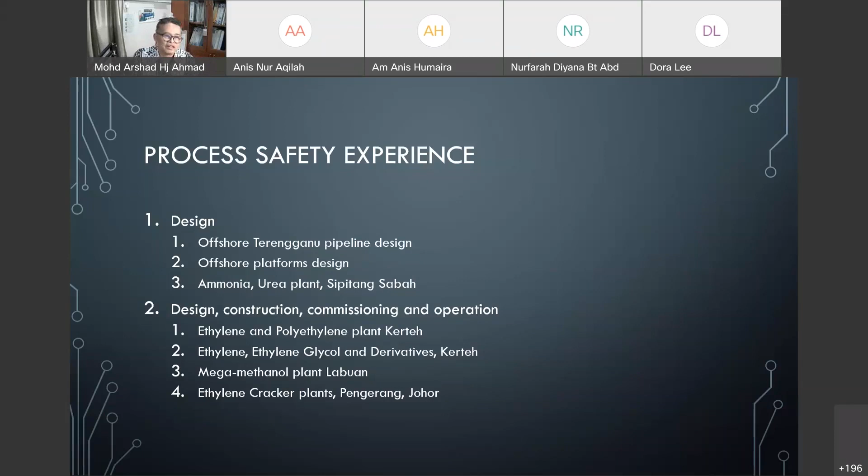I joined Petronas in 1980 until 2009. I retired in 2009, but continued my work with the company for the next 10 years until 2019, when I said, Mr. Petronas, I think I have enough. I'm too old to work already. My age is almost 68 years. Okay.

Okay. What's the objective of this presentation? By the end of it, I would like to introduce you to the knowledge of the safety aspects to be considered in plant design. Because without safety, the plant won't be safe. Always consider safety in every phase of the work in a petrochemical plant. Otherwise, something may happen, just like what we had this month or last month in Pasir Gudang.

Hopefully by the end of this session, you'll be able to understand the aspects of plant design. You know, plant design is not only designing the process. Every aspect of the plant you need to design. Even clearing the land from the jungle forest, there is a design over there. Safety risk in all aspects of the plant design. The types of accident that can occur during plant construction or commissioning. Always during construction and commissioning, there are a number of accidents happening.

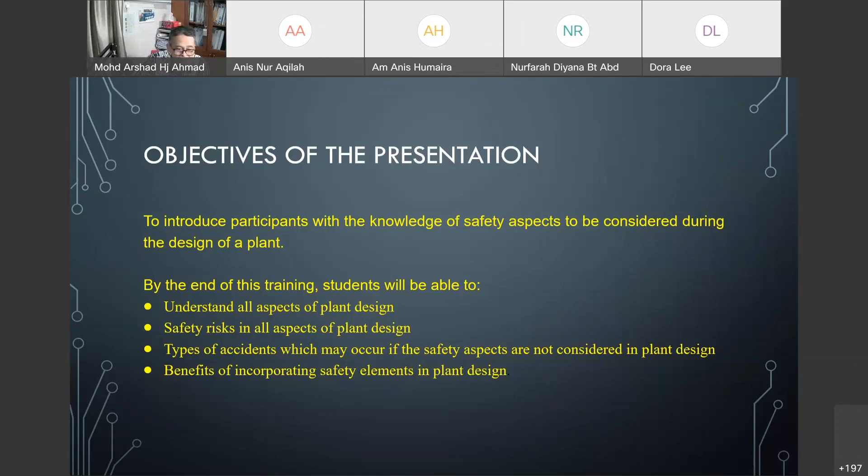And the main benefit of incorporating a safety element in the plant design. Special note: you are advised to focus on this presentation because there are not many notes. What I'm presenting is basically what I have been involved in, what I have seen, what I've managed in the past. So most of them are pictures, and whatever I say, take paper and note it down. I believe you have all the notes given by Dr. Yusuf. Maybe if time permits, we can have a quiz.

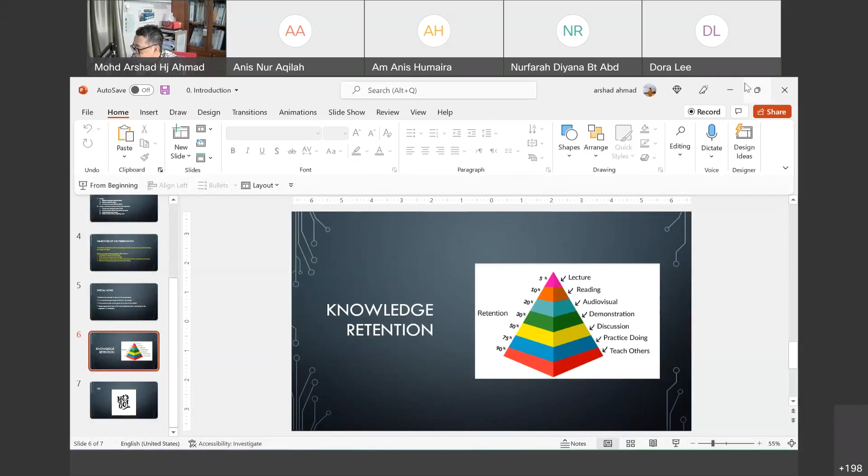Wait, I got a problem with this. Where is the? It became small. I'm not familiar with... kecil pula. Where is the sharing?

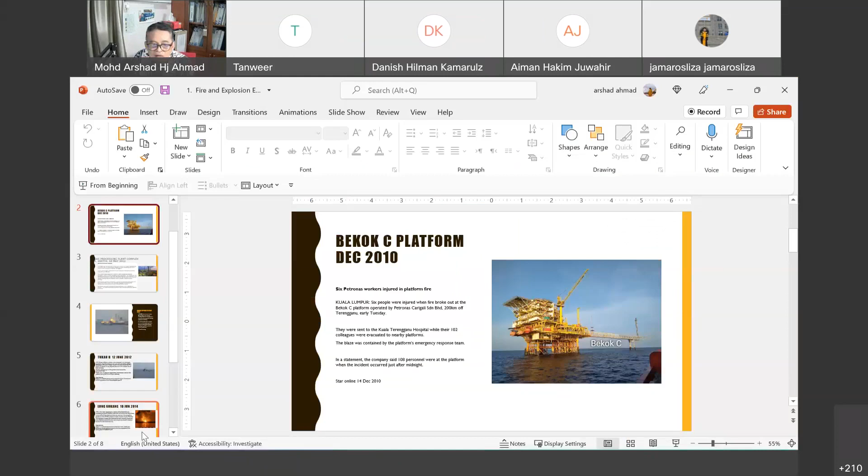Doctor, you just need to go to slideshow beside animation. Click the slideshow on the top. Oh, yeah, that one. Yeah, I have, but still the same. Actually, not this one, doctor. Where should Tuan Haji click? End the slideshow first. End slideshow. Okay. And then press on slideshow, which is beside animations on the top: animation, slideshow, review, help, view.

You mean click the animation? No. Click the slideshow tab, doctor, on the top of the slide. On the top they have some tabs. Annotate, participant, video mute, assign, share. Try to end the slideshow first. I have ended several times. Okay, and at the top you see insert, draw, design, transitions, animation, slideshow. The menu in your PowerPoint.

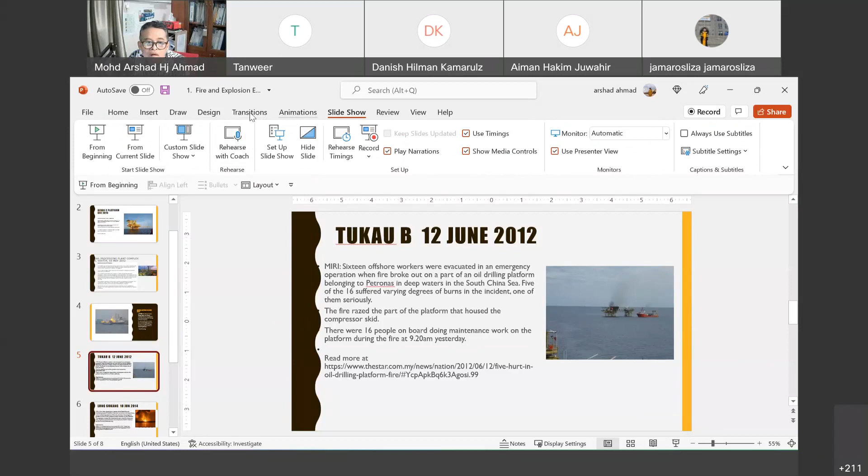On the top. Oh, slideshow. Yeah, that one. Okay. Not now. Then you can press from current slide, which is just there. No, doctor, below, right there. Oh, okay. Slideshow, from current slide. Now what do you see? It's still the same, doctor.

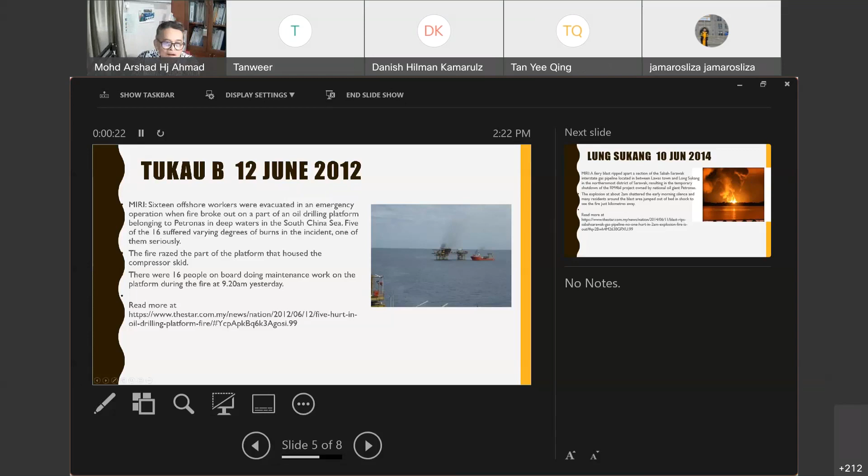Excuse me, I think this one can be much better. You can try to share the application. Just now, did you share the screen or the application? I don't know. You can just duplicate the slideshow. Okay. Now it's better. Now we can see your full screen, Tuan Haji. Okay, thank you, doctor. Now where is my screen? Let me do it again.

We planned to practice with Dr. Yusuf, but he had no time. Okay, got it.

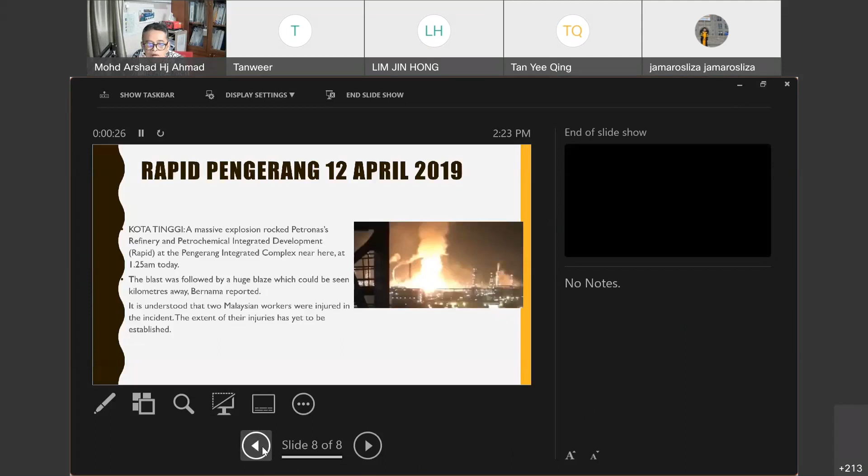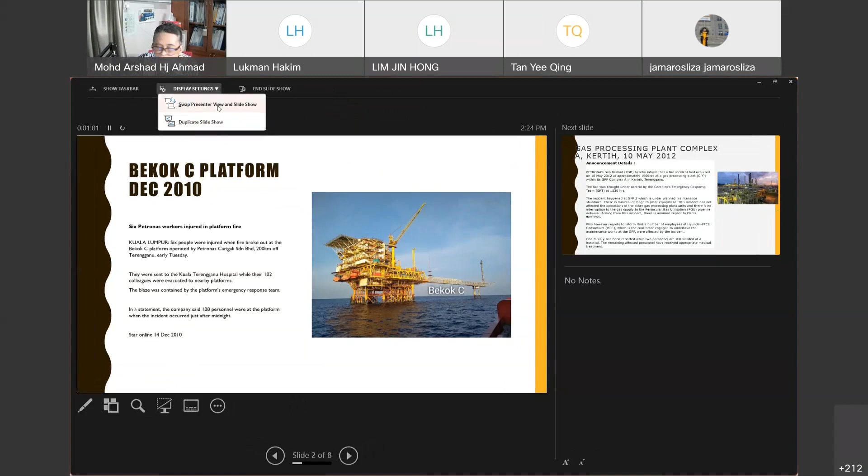It seems like it's back to the previous one, not full screen view. You can use the duplicate under the display setting. Something wrong. Do you see? Still the presenter view, sir. Okay, no problem. I think you can untick use presenter view in the slideshow settings. What do you see? Still the presenter view. Just click duplicate, it will be easy. Click duplicate. Okay.

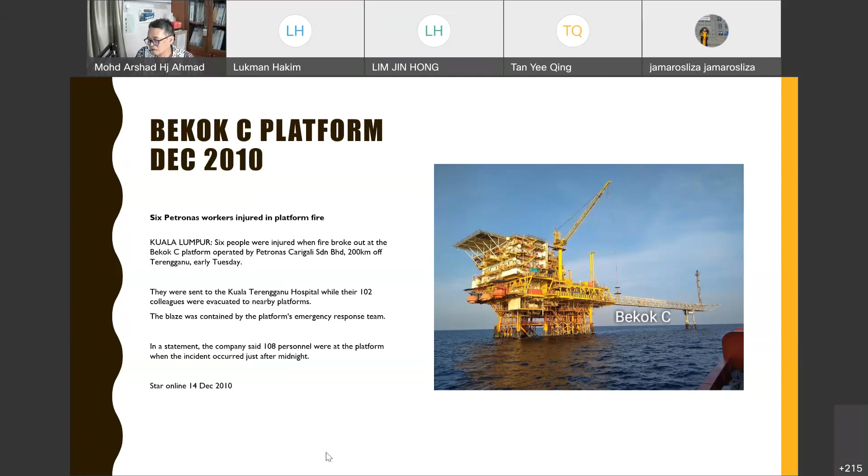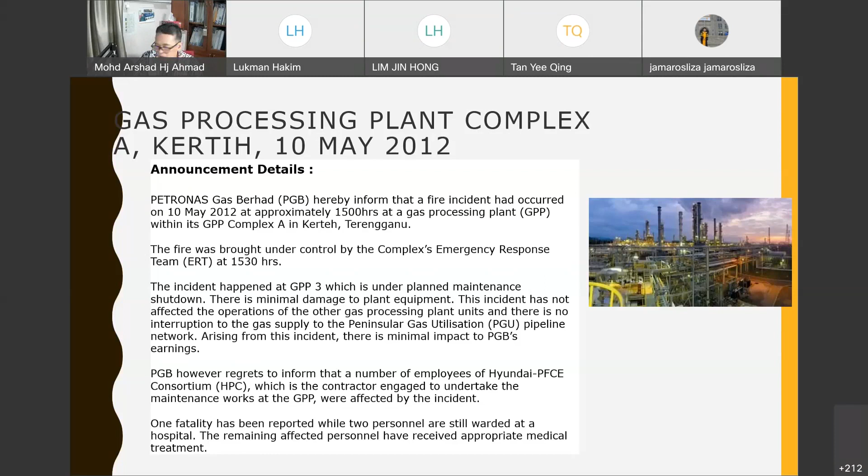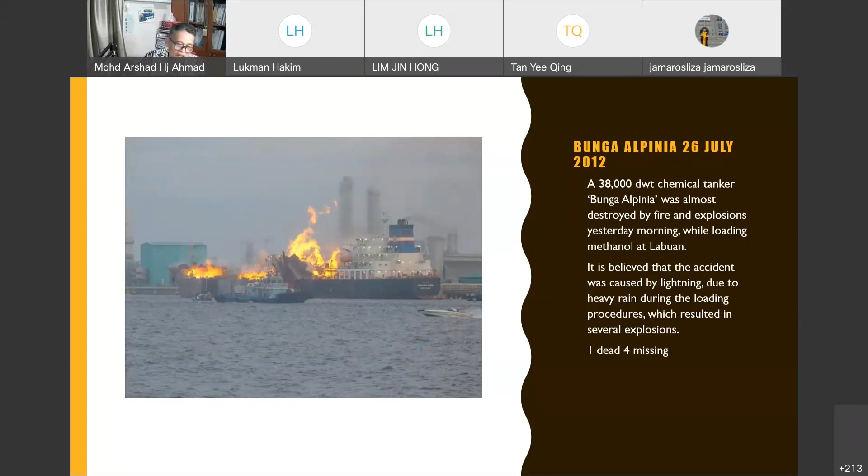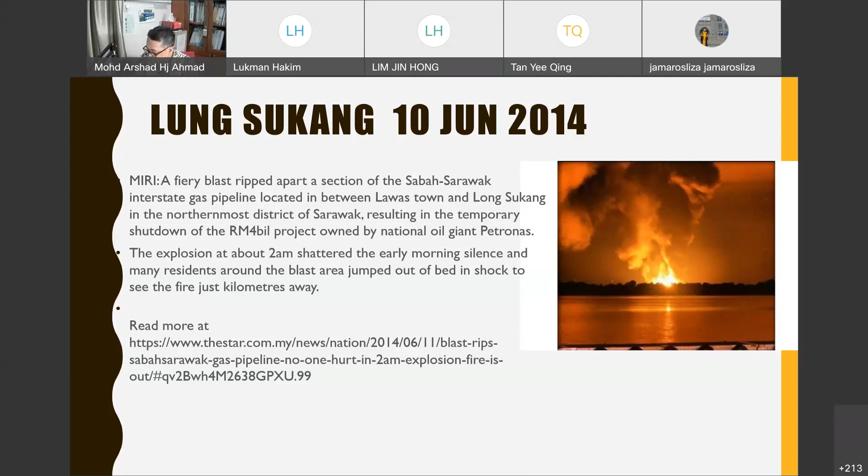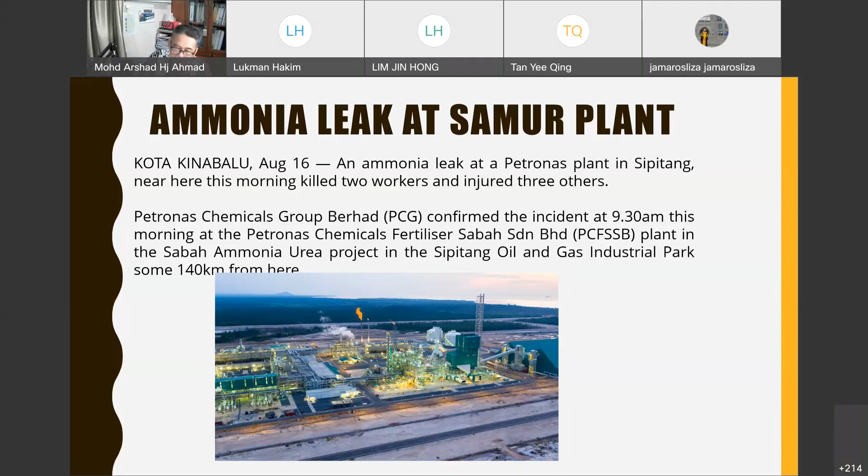Very bad. This is the latest, in Pengerang on 12 April. On 11 April - this wasn't my project, it was somebody else's; my project was the ethylene plant. On the 11th, I said goodbye to this plant, my final day at Rapid Pengerang. I reached KL at night. About 1:30, somebody called me and said there was an explosion in Rapid. I asked which one - refinery. Alhamdulillah, not mine, but it was a huge explosion.

What exploded was just - what do you call it - a cooler at the top. When the gas is hot, you have a cooler with a fan to cool the gas. It was hydrogen.

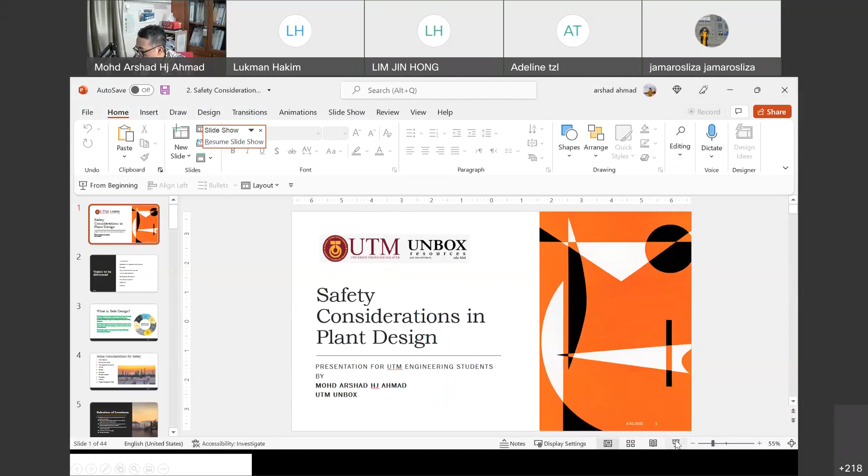This is the main topic that I'm going to present. It's about 40 slides. Hopefully you can manage it within one hour, two hours.

Safety consideration in plant design. You have seen the accident, and you must be concerned with the safety for the plant, because after the design, you will give it to construction. Construction will construct according to your design, and after construction finishes, they hand over to operation, and your design work is still there.

Unless there are some safety, unsafe items that we have overlooked and didn't consider, and no action has been done to correct the situation, that issue will be carried over from design, construction, commissioning, and operation, and will be there forever unless there are some reviews to be conducted.

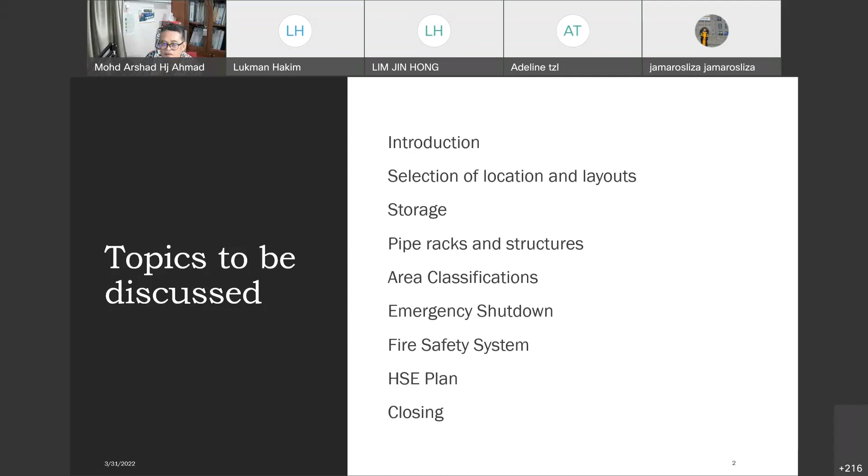Okay, what is a safe design? Safe design means integration of control measures early in the design process. What do you do? You have to look at the P&ID. What is P&ID? It's the drawing. Study the drawing, and if there is any safety concern, you have to look into it, remove it, and correct it.

So integration of control measures early in the design process to eliminate or minimize risk, not only during design but throughout the life of the plant until it is decommissioned. What is decommissioned? Until it's no longer productive, that's the end of life, whereby we mothball, meaning we dismantle the plant.

Where do we start? We start from the design. What do you do? You choose. What about the design? What is the safe design? Choose the type of design that you want to do. For example, you want to process methanol. You have to choose the correct design, not just any.

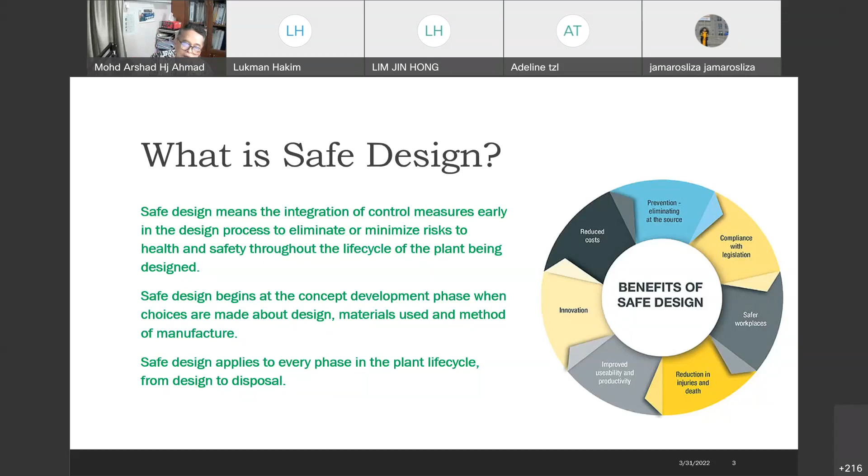Normally there are many designs in the market, and for methanol we don't have the design ourselves. We buy the design from a designer licensor, but we still have to review because they just give the simple process, and from there we have to do all the details. So safe design applies from the design itself until the end of the plant.

Okay, some considerations for safety: plant location, site and plant layout. If you have any question, just voice it out, because I don't know the chat. I cannot read the chat.

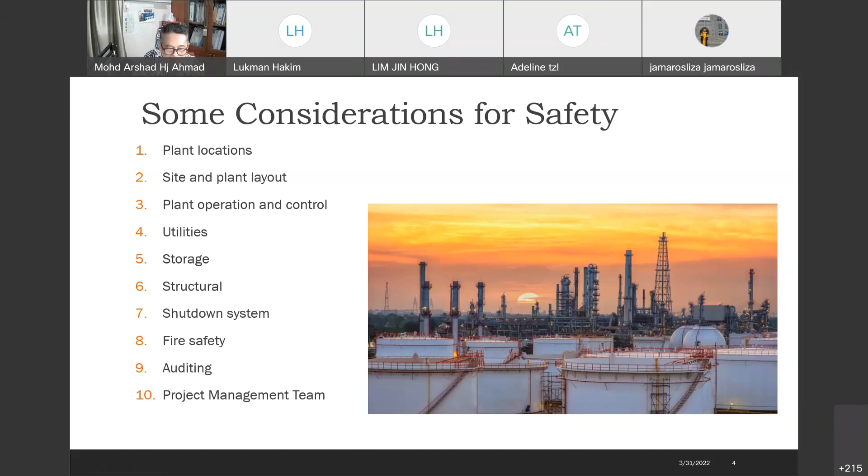Site and plant layout, plant operation and control, utilities, storage, structural, shutdown system, fire safety, and all those project management team.

Selection of location. Where do you want to build your plant? Of course, something that is cost effective, especially in production and transportation of material, either raw material as well as exporting product. When they built the ammonia urea plant in Gurun, they found out they didn't have any transportation plan, so they had to build a railway from Gurun to the port. I think it was Prai port. That's why you need to think wide. We need to have a wide view.

Where do you locate your plant, away from the main population? You look at Pasir Gudang, you have plant and housing side by side, and it is very unsafe. Okay, we'll talk later, I will show you.

Located where products and raw material can be easily transported. Okay, where is the best place? That's why you see most of the plants in Malaysia are located near the sea or near the port, because the port is already there.

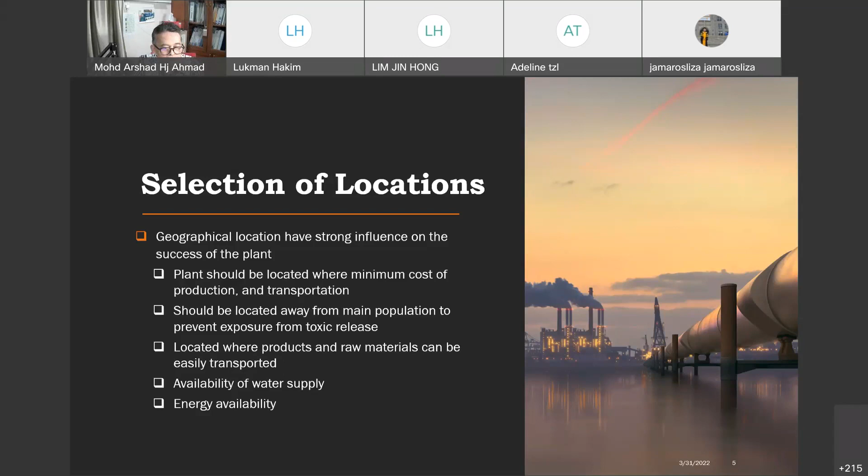And this shouldn't happen. When you build a plant, or design an industrial area, access is important. That's why normally all these plants are located near the port. Like Kuantan Port, you have Gebeng industrial area. Bintulu Port, you have Bintulu industrial area. Kerteh, you have industrial area, and you have Kerteh Port. Very easy for transportation of material. And of course the water.

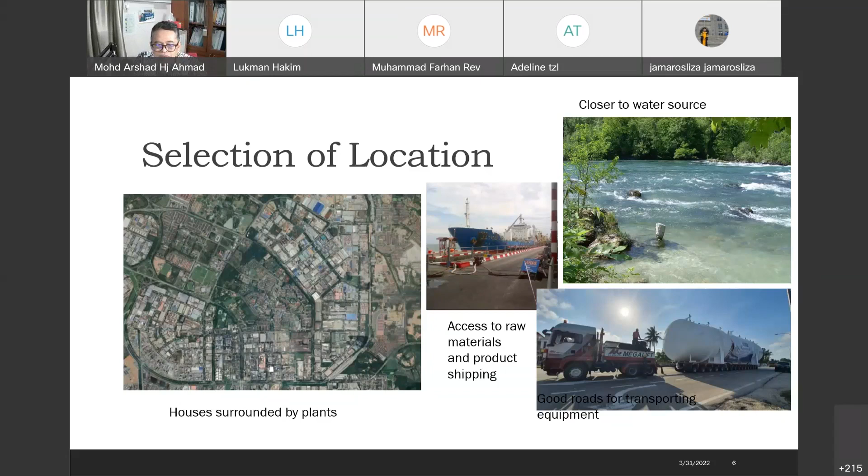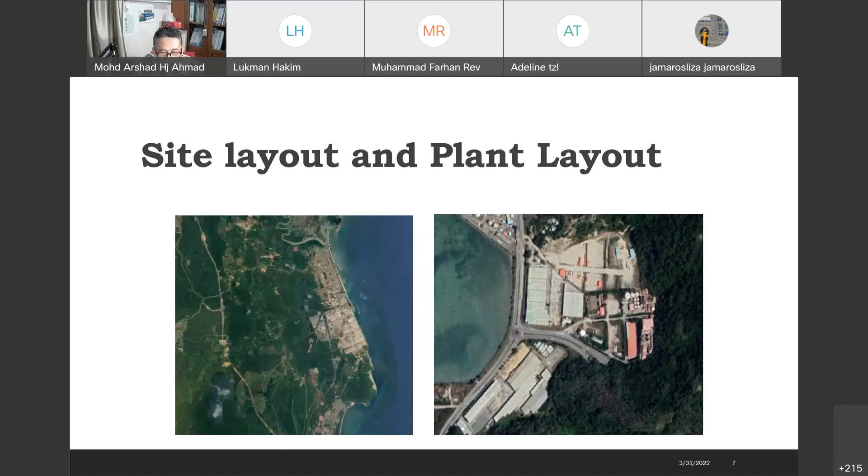Okay, you see the layout here. This is Kerteh complex. See, on the north is empty, on the south is empty. East is sea, west is still jungle. So housing is just very far away in the south, separated by a hill, and even in the north it's separated by river, but there is no housing around.

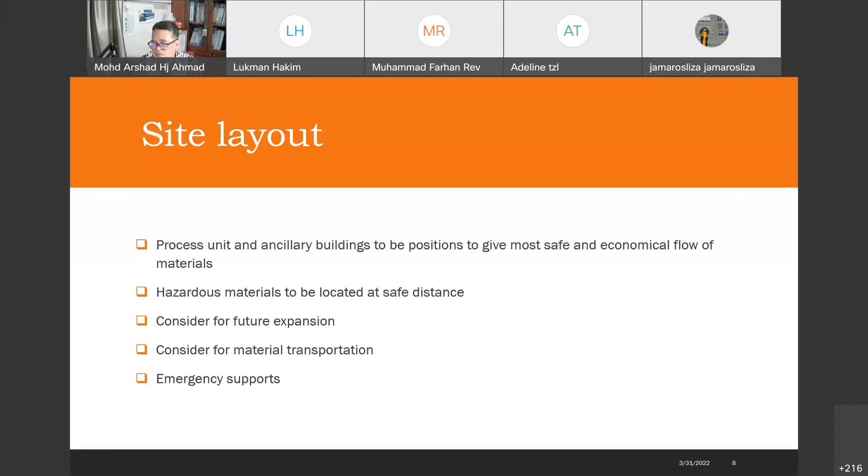Okay, site layout. How do you arrange your site layout? Process units and all the ancillary buildings, facility building positions must be in an economic flow. What does it mean? The piping, the wiring, cabling must be nearest to the production, so that's easy access. Another consideration is economic. Another one is safety. Why safety? Because you need to be very near to the facilities, very near to the fire water system and so on. And also you consider the future expansion, I will show later. And consider the material transportation and emergency support.

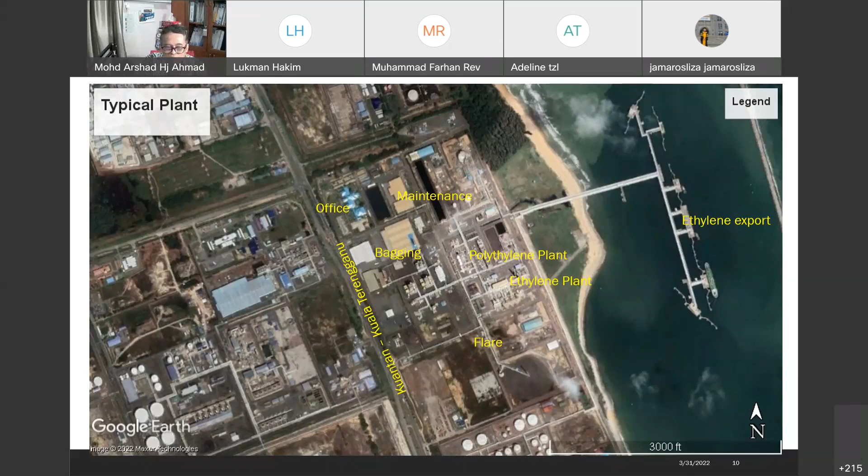Okay, look, this is my first plant, petrochemical plant. This is an ethylene polyethylene plant. You see, we have the highway, we have office, we have maintenance building, and the plant is way away from the main building, from maintenance office and so on. And why do you have a port here? Because it's easy for us to transport, to export our product. Our product is basically ethylene liquid. Or maybe we import some material, very near to the port, and it's very easy. Okay, so if there is any emergency, the office won't be affected.

Okay, some rules about layout. Building should be sited near the process. Utility building - what are the utility buildings? Utility buildings are control room, utility building, compressor utility building, nitrogen utility building, electric, and so on. Those are it.

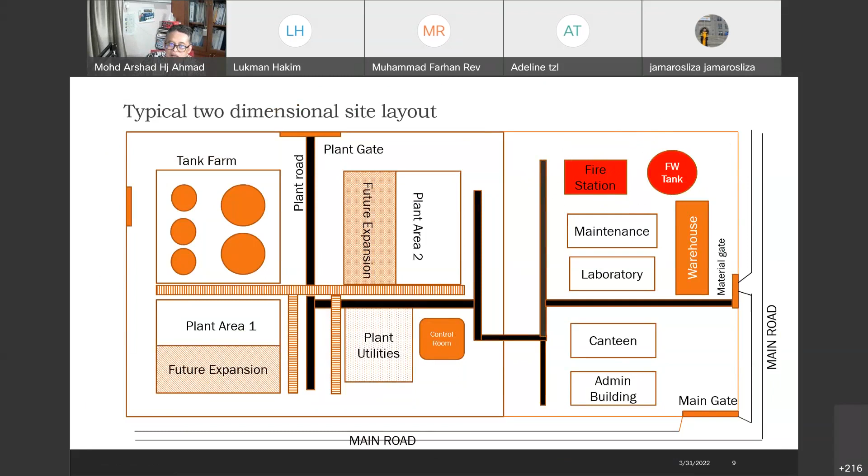Okay, you need to have a fire water system, as well as a fire station if you need one. Otherwise, you have to train your people to become firemen. But the fire water tank must be there. And a cooling tower is located downwind to prevent plumes and spray. You see, cooling tower, remember, cooling.

Okay. What happened in the explosion just now? It was located in the plant, and something happened. The whole plant was gone.

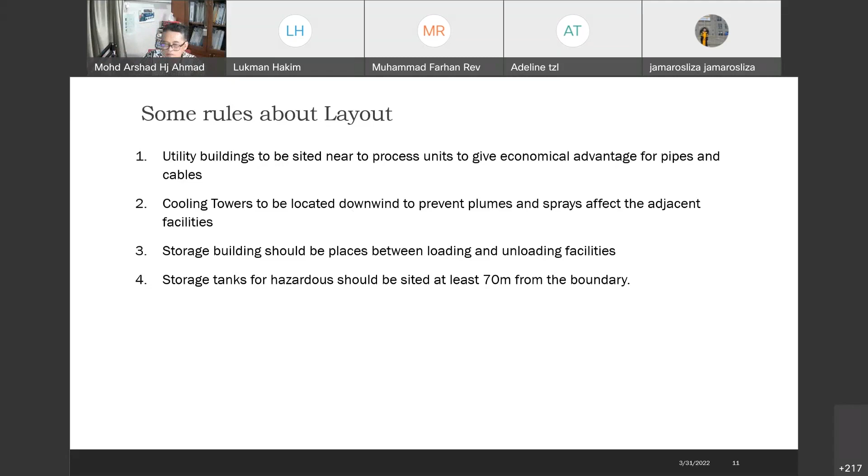Okay. Storage buildings should be placed where the loading and unloading facilities are, of course, near the road. Hazardous storage tanks are normally at the back, downwind. Okay. What happens if the tank is too close to the road?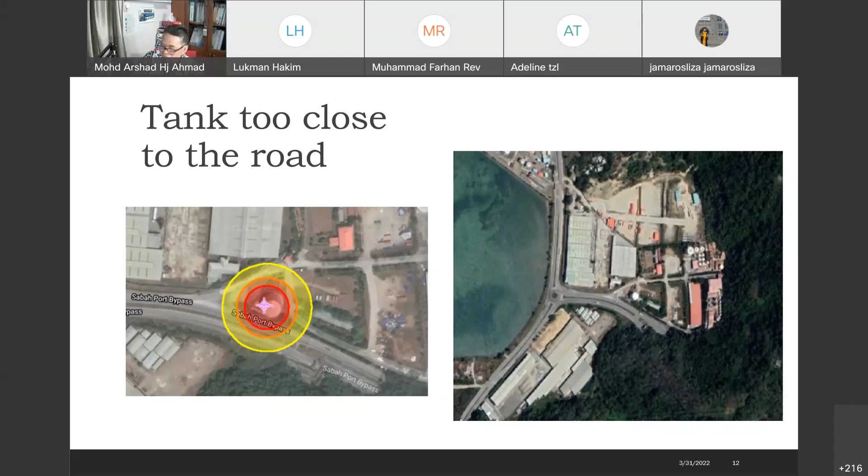That's the plant layout. Safe, economic construction and efficient operation depend on how you arrange the plant. What are the considerations? Safety, construction and operating costs, convenience of operation. Easy to operate. We don't want a very complicated design.

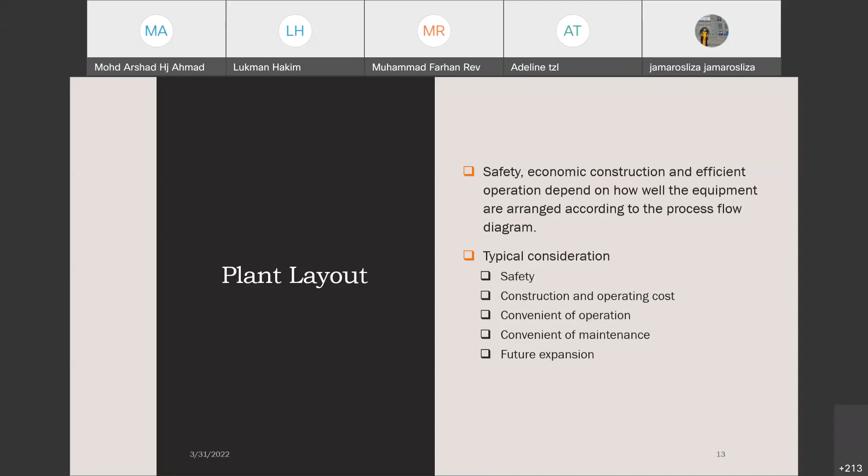This plant was not built by Petronas, it was built by the Sabah government. When they couldn't make it, losing money every year, they gave it to us, and we turned it around and it became very profitable. When I visited the control room, what do you see on the left picture? There was a glass window. This shouldn't be done, because the plant is just about 50 to 100 meters from you. What happens if there is an explosion? All the guys here may get injured or be killed.

So the design should be just like the picture at the right, blast proof, which means no glass windows, no glass door, nothing. We call it a blast wall, which can withstand 0.5 bar of overpressure. So even if you bomb it there, nothing happens. So that is the good design.

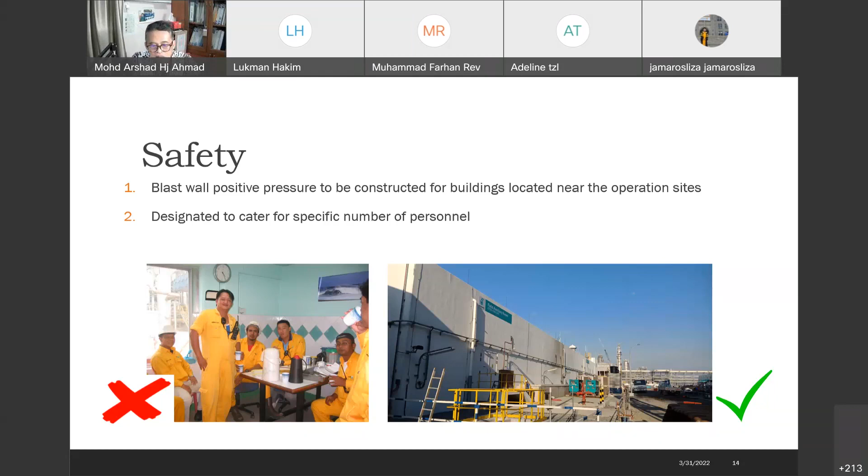Okay, convenience for maintenance. Why? Heat exchanger tube bundles can be easily withdrawn. Look at the picture on the right. Those small horizontal vessels are heat exchangers. So when you want to withdraw the bundle, that's why you build it outside.

And vessels require replacement of catalyst. That's why all vessels or reactors which require frequent change of catalyst must be located outside. You see, those guys are doing the catalyst change outside. When they fill up the used catalyst, a truck can just take it out and send it for recycling or whatever. And easy dismantling for maintenance.

Look at the middle picture. That's what we call an overlook, a design overlook. The manholes of two vessels are facing each other. What happens during maintenance? The air blowers meet each other. That is unsafe, because the toxics from one vessel go to the other vessel.

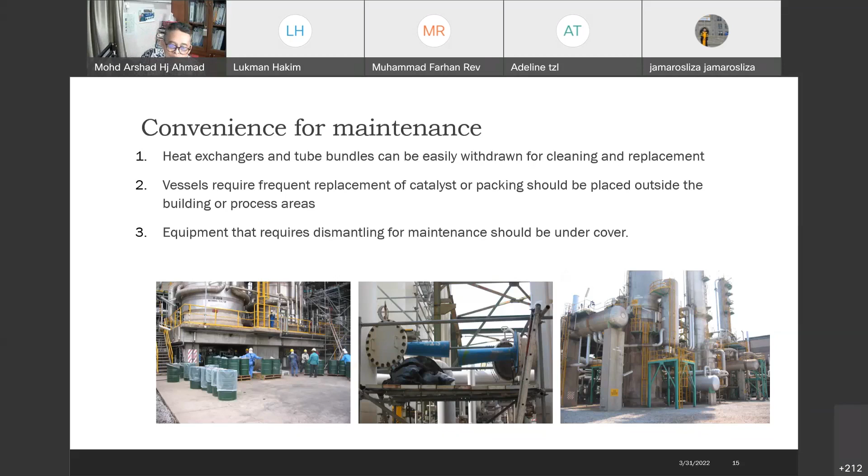To avoid that, we have to do them one by one. You finish vessel A, then you do vessel B, and it's a waste of time. That's why this is something you have to consider during the design. Okay.

Okay. In the old days we had only the P&ID, and then you changed it into isometrics, one isometric per pipe, and you went to the site and built the pipe according to the isometric. Now it's very easy. From 2D, we changed to 3D, and this is very advantageous for us.

One, it's easy to detect interference between pipes. Sometimes you build, and then the pipes don't match each other because of some differences in the length, in the measurement, and so on. Okay. With this, if there is any abnormal design in the piping, it's easy to rectify.

And another one, you look at the yellow staircase. Those are the staircases, and from here you can study the escape route during an emergency. Okay, and also for firefighting.

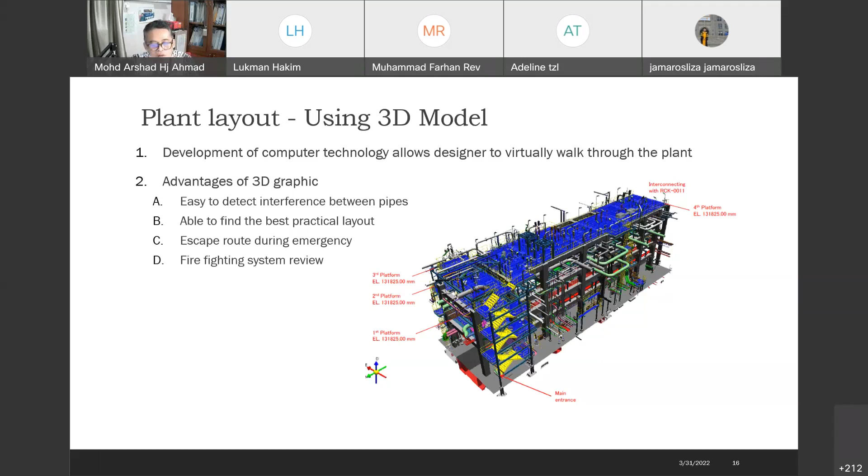You look at the red pipe. Those are fire water lines. Okay, from here you can know where to put the hydrant, monitor, and so on for firefighting. Okay, if it is not covered, we can easily see this floor has no red pipeline, and so on. Easy for us to review. Okay, escape route. Okay, it's very easy.

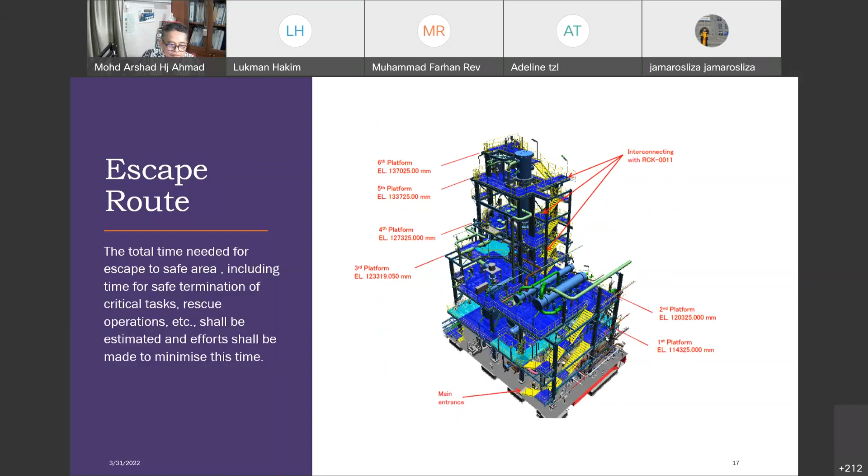Right. Okay. Storage tank. You have to choose what type of chemicals for what type of tank. There are many types of tank: fixed roof tank or floating roof tank, and many others. Fixed roof, particularly for high flash point, cone roof, dome roof, and the advantage is that it's easy to construct. Okay.

But the disadvantage is that for this kind of design, you put the liquid inside, and you allow the vapor to evaporate and escape to the atmosphere. Then the floating roof tank is basically for volatile liquids. This one is only for crude oil. It moves according to the volume of the tank.

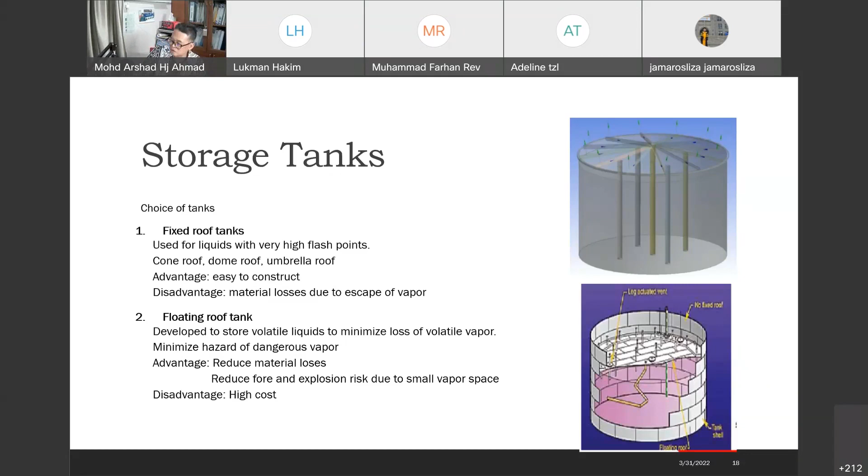So we have no gap between the roof and the liquid, so that there is a stable liquid-vapor equilibrium over there. And with this, you reduce the escape of vapor. It is a very high cost, but it is very, very safe. Okay.

And there are some incidents. I was in a refinery, about 200 meters from the security gate. The security was complaining: we smell oil almost all the time, when the wind is coming from the sea. And I asked the IH technician to go and measure and investigate what the vapor is.

Okay, and we found out that it was a very high concentration at the gate, 200 meters away, more than 2 ppm. And it was found out that it was benzene, and it was wrong to use a cone roof for benzene, because, as I told you just now, the vapor escapes to the atmosphere and somebody downwind will inhale it, and that can cause cancer, leukemia, and so on.

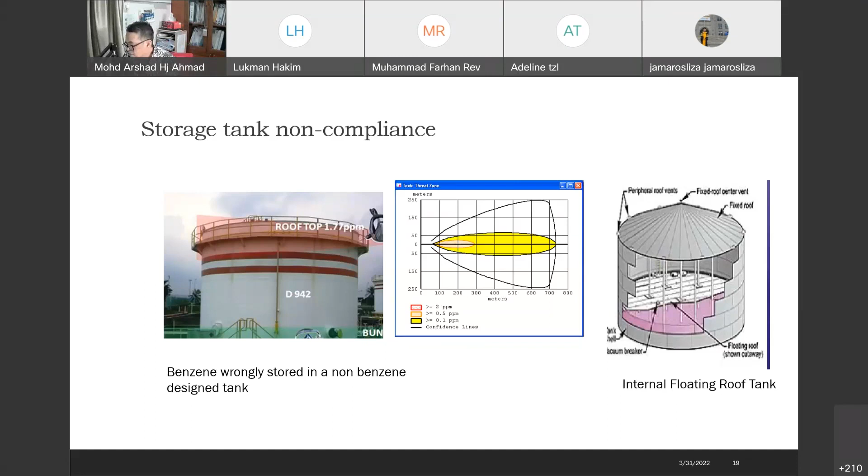Okay, safe distance between tanks. Okay, why do you have a safe distance between tanks?

There is a code there, the Refining Safety Code, that shows the distance. Why is there a distance? Okay, it is to avoid the impact: if there is a fire in one tank, the heat will not affect the neighboring tank.

Either you follow the code or you do some simulation, consequence modeling, and just now you saw the red, orange, and yellow. Make sure you do the simulation of fire in a tank, and make sure that the red line does not touch the next tank, and that is a safety factor. Okay, that's the distance from one tank to another. Otherwise, you look at the safety code.

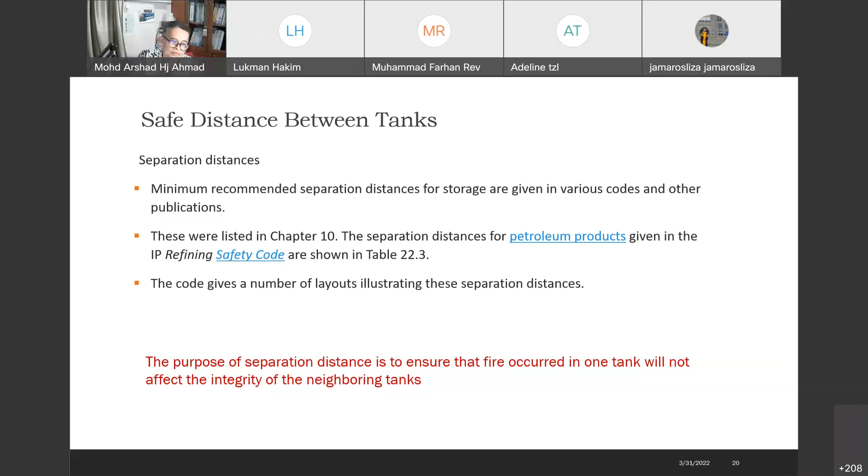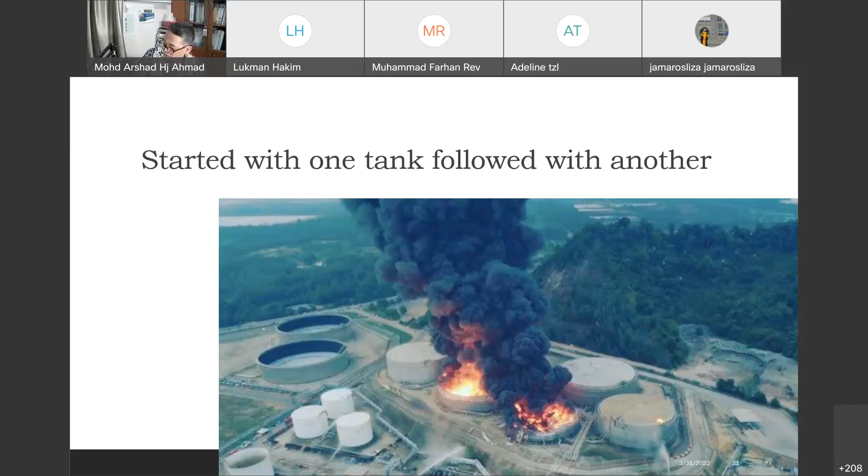Okay, pipe rack and structure. This is also very important. What is a pipe rack? When you build a house, you have a beam, a column, and so on. You have a structure like this, and this one is to support the vessel, the piping, all the machinery, power cables and so on. Okay, support everything.

In the old days, we used to have a steel pipe rack. The plant that I showed just now, the old one, was built about 30 years back. They used a steel pipe rack, and after some time, after 20 years, if you don't take care of the coating, the corrosion prevention, in the end it will collapse.

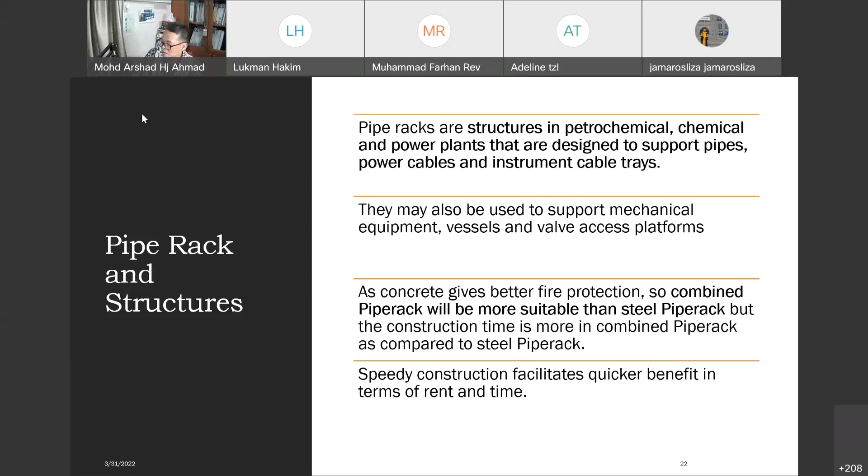Okay, this is what happens if you use a steel structure. If you use a steel structure, you have to consider the fire protection. We call it passive protection. It's something like concrete covering the structure, so that if there is a fire, the steel is protected.

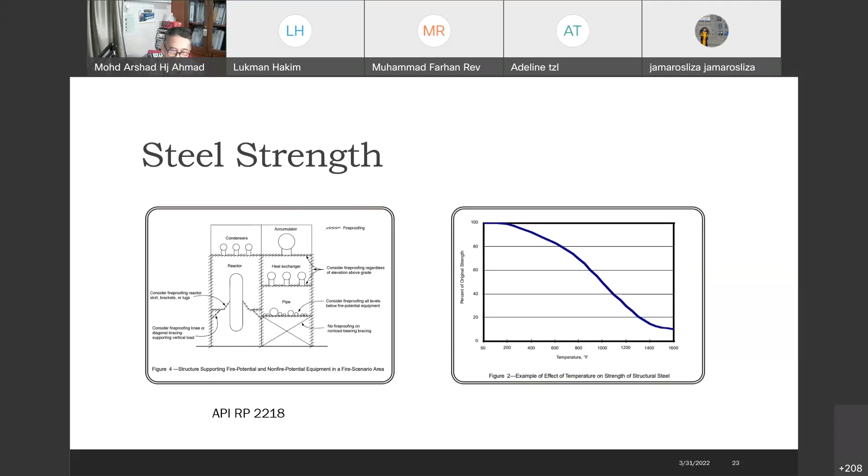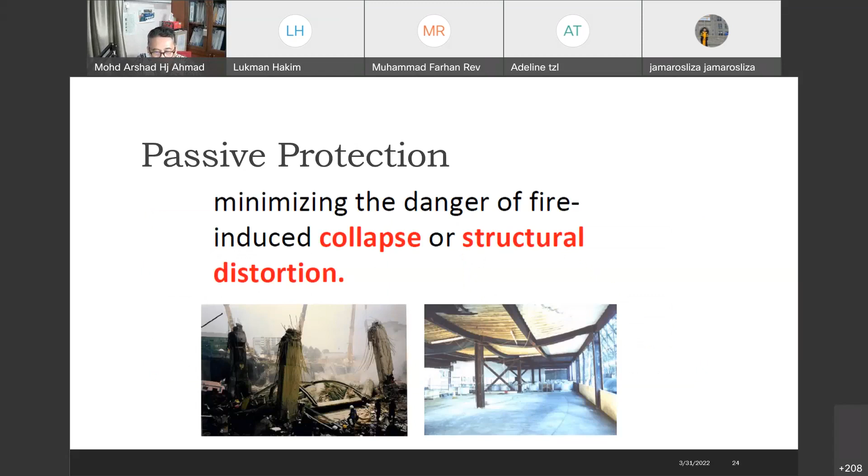In the event of fire, the steel becomes weaker and weaker. When the temperature rises, the steel gets weaker and weaker. So in the end, this is what happened. It will collapse. The steel will collapse. Okay, but now in the modern plant, we have concrete.

But it is very slow in the installation process, especially when you design it incorrectly. This is our first concrete structure, and one of our mistakes was each structure was numbered. For example, this beam is attached to this beam. We have numbers A to A, 1 to 1. So when the concrete structure was sent to the field, we had to select beam number 1 to 1, because it marries with column 1 to 1.

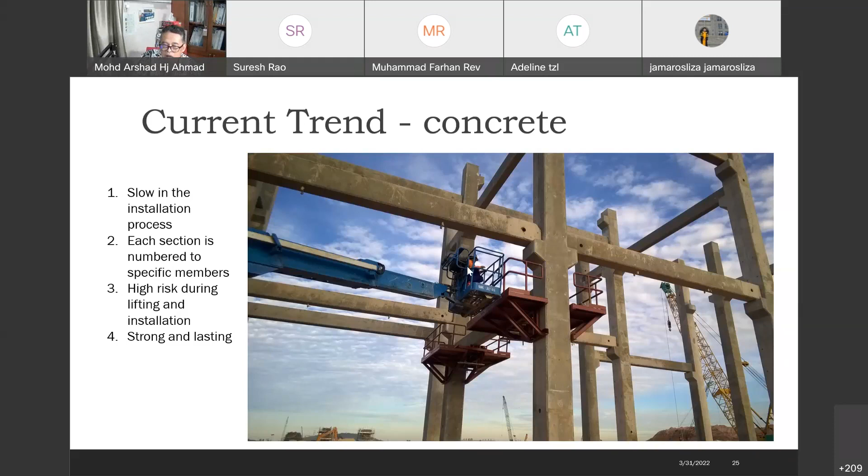That's very difficult, and we had to be more creative in how to install this. It was our design error, I have to agree, and we had to use a lot of manpower like this. It's very unsafe, but it is strong and lasting. Why doesn't it bend during fire? It is strong, but it is unsafe. You make a mistake, it falls.

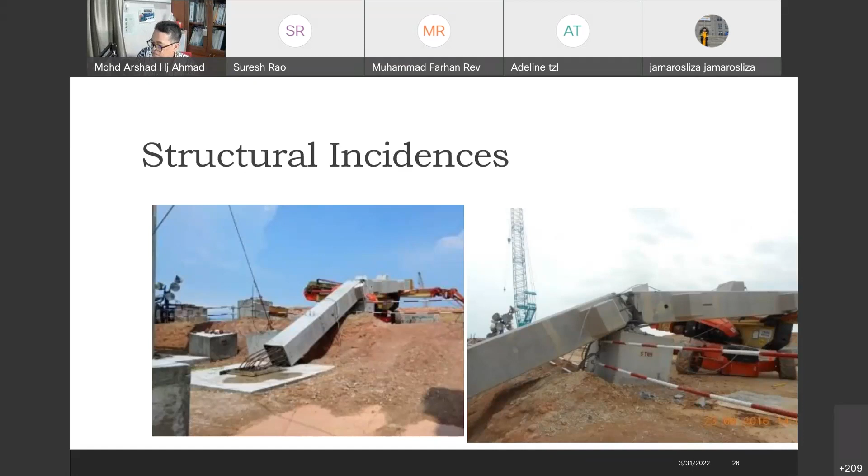Okay, and when we built the column, we had 4 guy wires, but somebody who was smart enough removed one wire, and the column fell onto the crane there. Luckily, nobody was there. That's one disadvantage of a concrete column. Very difficult to install, but once installed and it becomes a structure, it's very safe and long lasting, and not so expensive compared to steel.

Okay. I think another one is area classification. Area classification is you need to classify your area, whether it is fire hazard or non-fire hazard. Why?

Because in some of the piping, especially when there is no flare system, no vent system, they vent it in situ, and that's very okay. How do you classify the area when you have a continuous air emission? I mean gas emission, vapor emission, and your ventilation. You have a combustion inlet and so on. Ignition source, emergency equipment, and so on.

So, in order to prevent fire ignition, you have to classify the area. This area is a hazardous zone. This is a non-hazardous zone. That's why machinery shouldn't be built near the hazardous zone. Okay. There are some distances that are given by the codes, by standards.

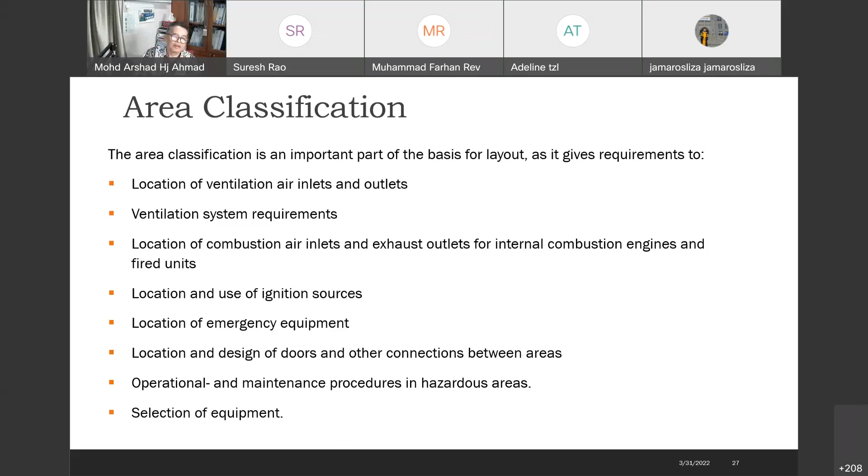All the moving, rotating equipment must be fire safe, intrinsically safe. And that's why you need to have a selection of equipment to be used in that area. Okay. This is a simple one. I have to move this. Okay. A simple one that shows a hazardous area can be divided into divisions. Sometimes division, sometimes zone. Depends on the company, how they want to name it. Okay, this is from a standard.

Okay, you have a tank. Division 1 is where you have a continuous emission of vapor. Division 2 is something around that, but, what do you call that? Probably the chance of catching fire is there, but division 1 has much higher chances. Just like the ship just now, when they opened the manhole, it's a division 1, and there shouldn't be any spark, but instead lightning came, and you have an explosion.

When you fill petrol at a pump, the nozzle of the pump, when you put it into the car, that is a division 1. Okay, division 1. That's why no ignition source should be there. No smoking, no telephoning when you are filling up the petrol.

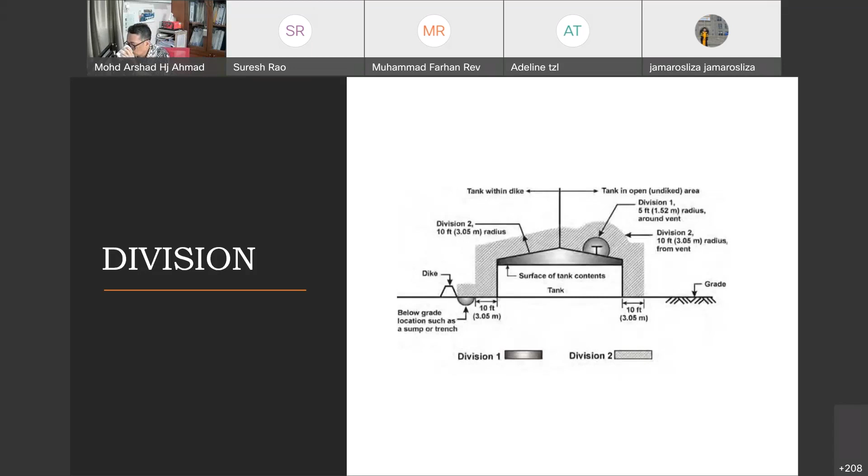Okay, this is another one. A lorry comes to the petrol station, and they fill up the tank. This is a zone. American division, Europe zone, if I'm not mistaken. Okay. Zone 0, zone 1, and so on. See, zone 0 is very flammable. Okay.

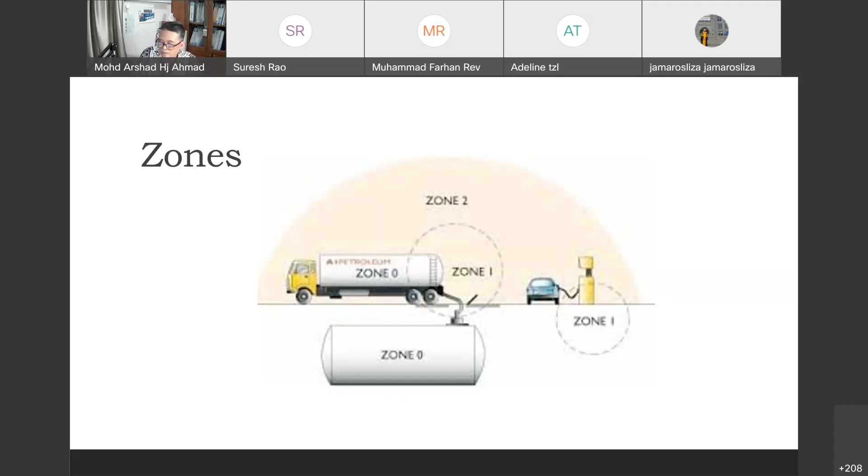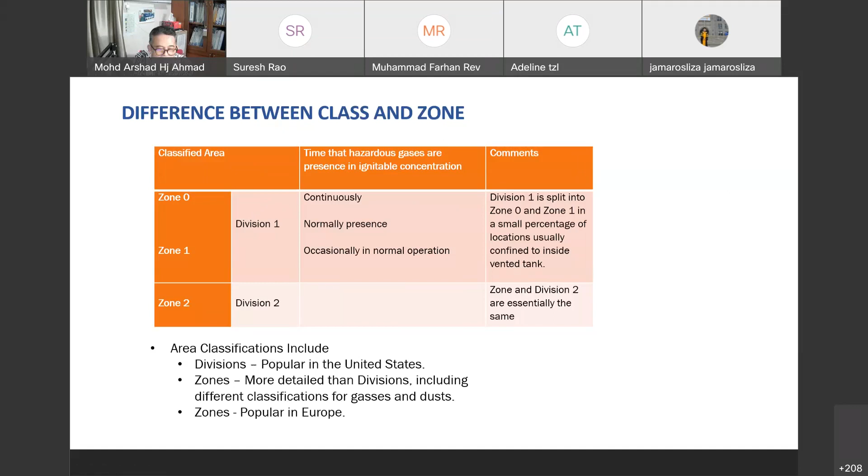Okay. The difference between this: normally we use zone, not much division, and, wait. Division is popular in the United States. Zone is more detailed. That's why we use it. Most of us use zone because it's very detailed, popular in Europe. I think never mind this one. Okay.

One thing that you have to think about is the emergency system. There are two types of emergency system. Process shutdown, where we only shut down the process. And emergency shutdown, whereby you shut down the whole plant. If there is any fire, we do ESD. The whole plant will be down because if there's a fire, we don't want the fire to spread to all the other parts of the plant.

That's why, if you look at pictures of plants somewhere internationally, you see the whole plant sometimes collapse, all burnt. Why? Because they think that part of the plant is far from us, we can continue our operation. In the end, it spreads to the other side of the plant.

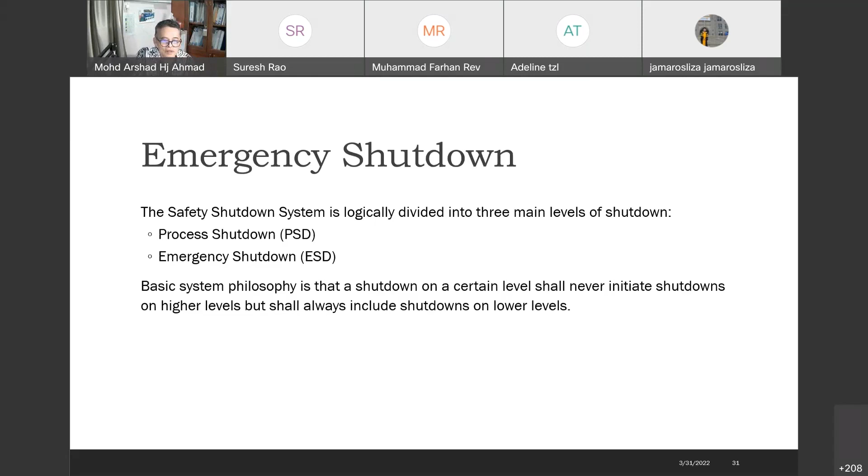Okay, that's why if you are from Terengganu or you pass through Terengganu, if you see this kind of flare near a refinery, it means something is wrong with the plant. So they empty the process and send the gas to the flare. Okay, they have to do that.

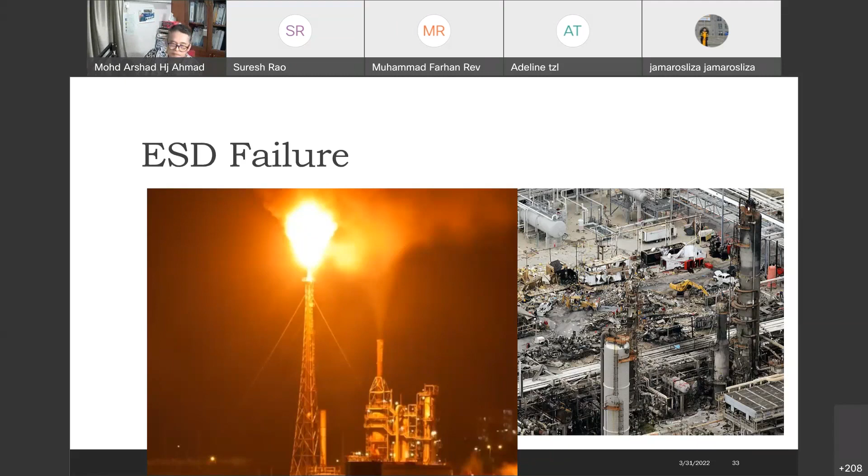Otherwise, and there are some controls, instrumentation as well. If they fail to do that, you see, this is Texas. Because the flare system failed, the whole plant burned. Okay. Fire safety system. How we can manage.

What is a fire safety system? It's a fire suppression system, smoke detectors, sprinkler system. One is to prevent fire, and then another one is to stop the fire, suppress the fire. Okay.

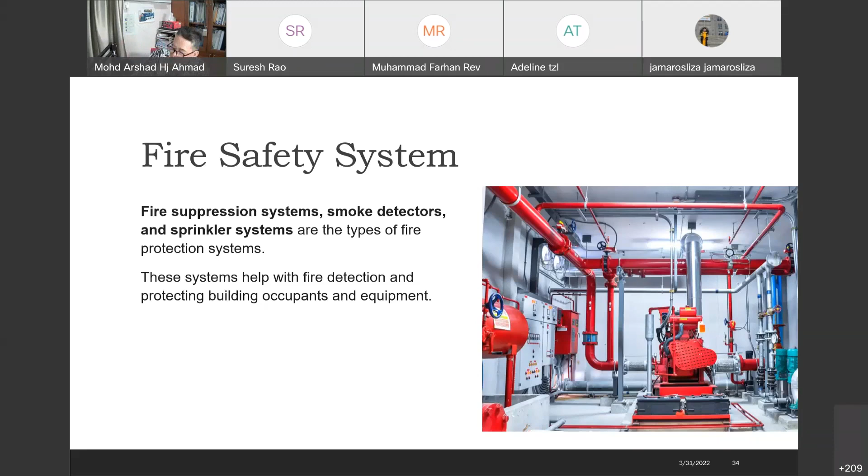So what are the elements of the fire safety system? Okay, it's detection and then action. You detect fire, shut down the plant, and firefighting. Okay. First, you need to have fire and gas detection.

What is fire and gas detection? There are two detections. One is to detect the fire. If there is a fire, they detect and send the alarm, send a signal to the control room and trigger the plant alarm, fire alarm.

Gas detection is different. They are separate systems, you know. They don't use the same power. They don't use the same cabling and so on, and they don't use the same sound. Okay, this is to detect that there is a gas leak somewhere in the plant. Okay.

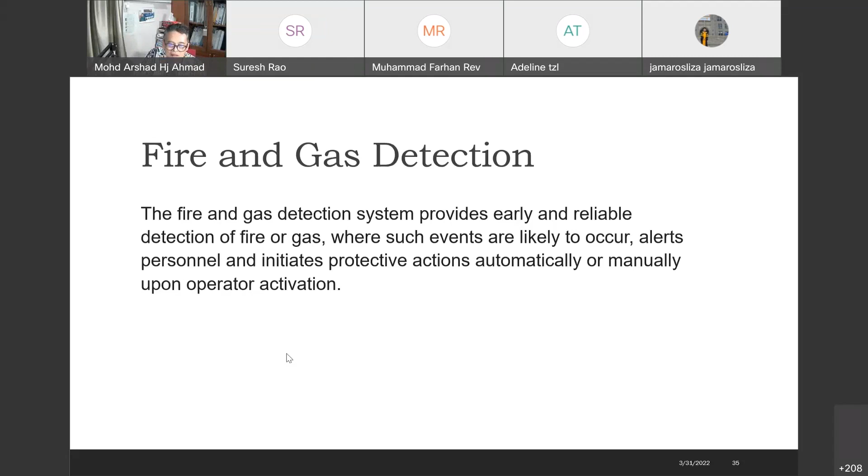What is infrared detection? Infrared detection is, if there is a fire, this is just like a camera, and if it detects a fire, it will send the signal to the control room, and the control room will turn on the fire water system.

Just imagine, I'm a chemical engineer. I have to study this and I have to certify at the factory this is correctly designed. And you have to diversify yourself, especially in reading electronic diagrams. That's the advantage of a chemical engineer. You know the physical chemical properties, and when you learn electrical and electronic, that's an advantage for you.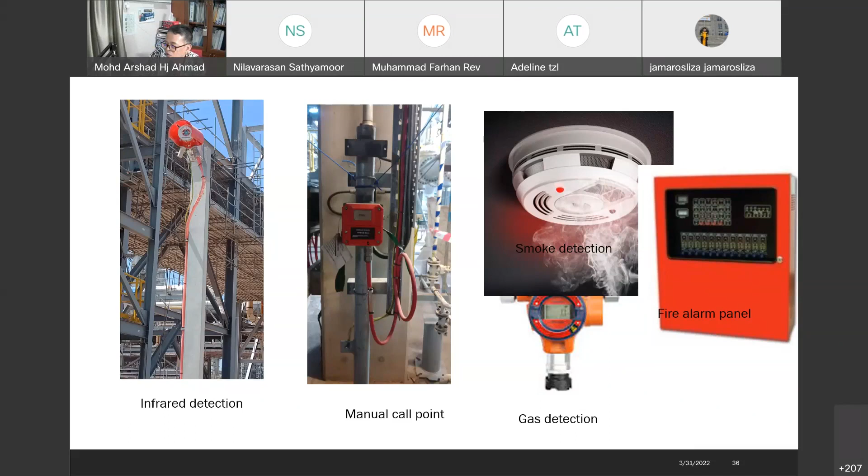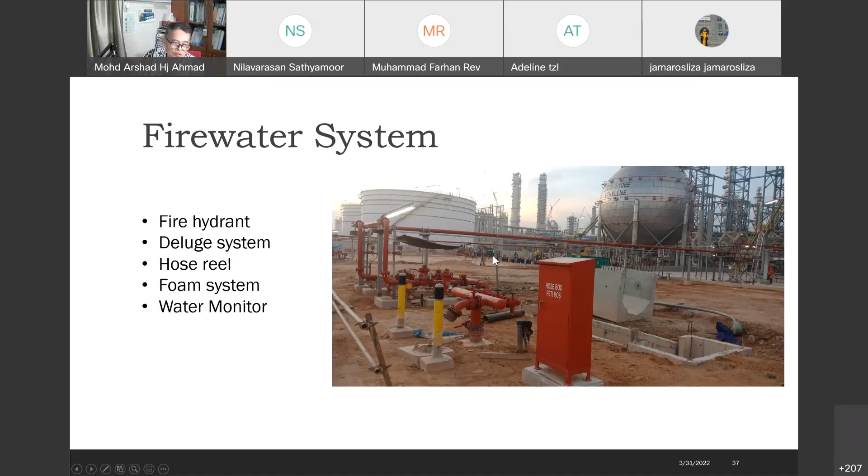Okay, fire water system. See, we have a fire hydrant. Where's the fire hydrant? Here, fire hydrant. Deluge system, here. Deluge system is when the camera detects the fire and the control room will open this valve, and you have the water spray onto the vessel. Okay, the same for the one behind. Sometimes you have foam over there, water monitor, and so on. Okay.

Last but not least, you need to have an HSE plan. What's the purpose of the HSE plan? Okay, you need to have a scope and a purpose of the program. During the design and construction, I was only in charge of the design and construction HSE plan. So I had no hand in the operational HSE plan. Okay.

We set a system of risk assessment, the type of risk assessment, and the acceptance criteria. What is the acceptance criteria? It is the level that you feel satisfied. For example, the level of risk acceptance criteria is based on the code and standard, your own standard, regulatory standard. If it is acceptable to those criteria, this is the acceptance criteria.

For example, just now, distance between tanks, for example, one diameter of the big tank. That's what the code says. So that is the acceptance criteria. We cannot have less than that. Yes, we can have less than that, but you must have a water spray. Okay. Track of assumptions and decisions related to safety. Procedure for handling deviation.

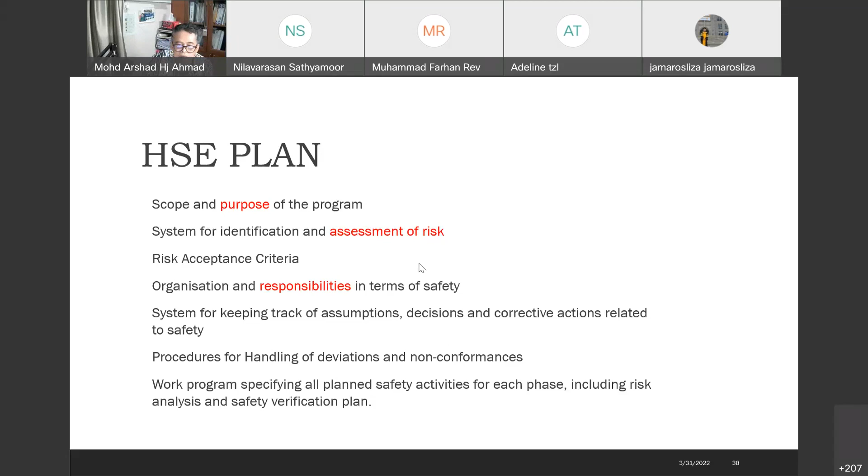There are many deviations we did during the design. For example, our standard says ABCD, but we cannot meet that standard. You need a deviation, and that must be recorded under MOC, Management of Change. All non-conformances must be recorded and corrected during the design itself. You must complete 100% before you do the construction, unless the non-conformance is to be corrected during the construction. Okay, and the HSE plan also programs the safety activities during all phases. These are the phases.

This is the Petronas standard. These are the phases of safety review timing.

Feasibility study. What is a feasibility study? Okay, say our president wants to build an ammonia plant near UTM, somewhere in Skudai. So we have to do the feasibility studies. We have a conceptual study - is it possible? Is it possible we do it beside UTM? So we study.

We did all the EIA, the environmental impact assessment. You do all kinds of modeling, hazard identification systems, and finally the study says, Mr. President, it's not possible because it's very near to the university, so cancel.

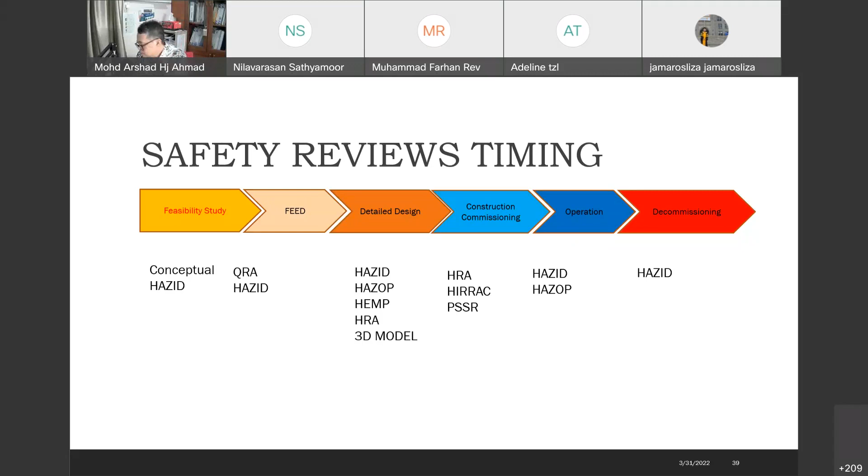Risk reduction principle - I think we're almost there, we can have a question and answer after. Cost benefit, I hope you understand. Risk reduction principle: if the plant is safe, you have a green zone, it's acceptable.

After going through all the reviews, hopefully your plant is within the green. If there are still some risks that are unavoidable due to difficulty in doing the correction - difficulty, cost, and ROI, return on investment - is it viable to do that? If the cost is expensive and the benefit is not much, we have to live with that.

That's why we call it ALARP, as low as reasonably practicable. When you are in the ALARP, the yellow zone, you have to follow some procedures to prevent any incident and keep the plant and people safe. In the red zone, you have to shut down the plant and take corrective action.

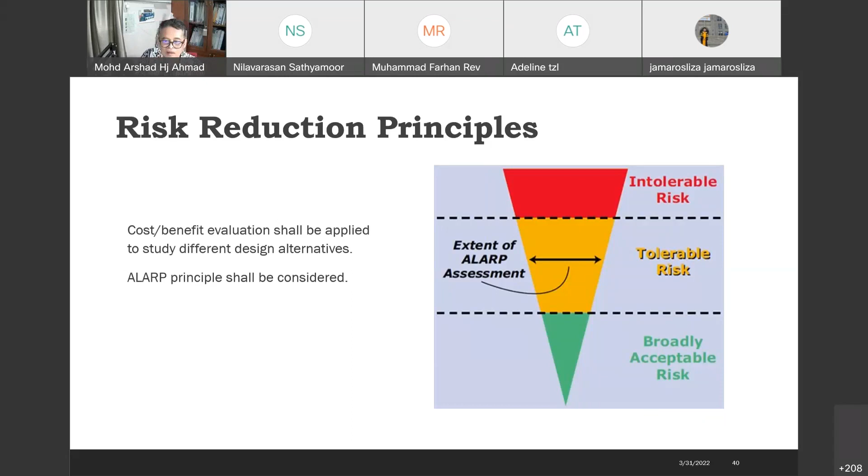What is ALARP? As discussed, tolerable means an ideal level of risk - the risk is negligible, so small that it can be managed by routine procedures, without needing many additional risk treatment measures. If you want to put the risk to zero, it's very costly - cost increases as you go down.

ALARP is something where there's a risk, but you can tolerate it with procedures that don't cost much, and can be implemented.

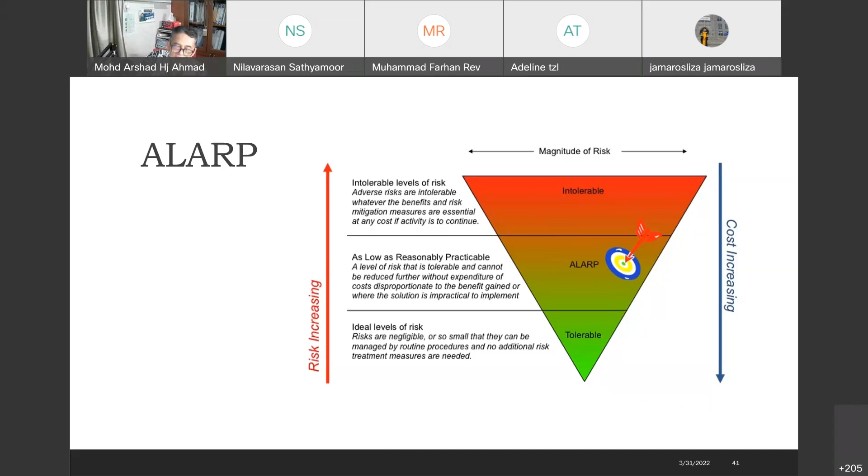When you go in, you are under what's called voluntary risk, meaning you voluntarily go in because the plant must run, and you must make a living - you have a family, you want to live, and like it or not, you have to go in and work. But if it's intolerable, better shut down the plant - the risk is very high, and you have to do everything in your power to make the correction.

In summary, your design should be simple, comprehensible, and recognizable. Because which means acceptable.

What are the elements that we can think about? Limiting the amount of equipment. We don't want so many controls, so many machinery, a lot of redundant equipment.

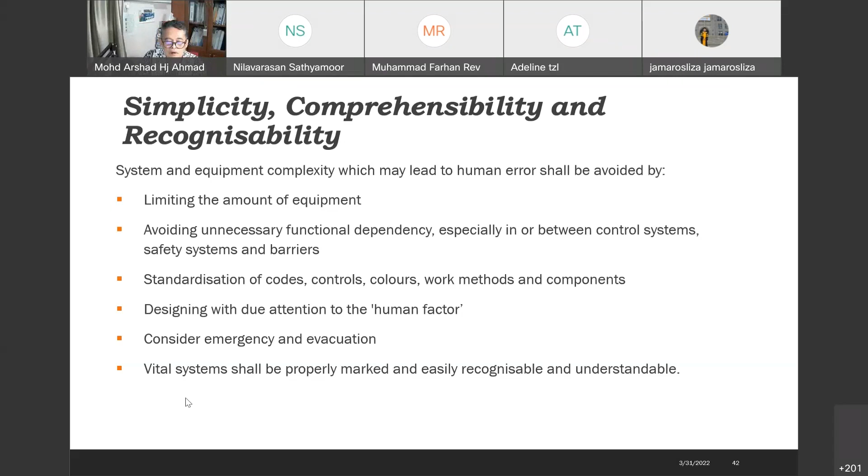Okay, that's the last slide, we have another 50 minutes. What's the benefits of safe design? Where do we start? First, to design a plant, I must look at the regulations, DOSH regulation, DOE regulation, whatever regulation. Those are the basis of our compliance. And then we go to code and standard and so on.

So the benefit is that we comply with legislation to reduce, kena saman if you don't comply. Another one is with a good design, we have a safer workplace. With safer workplace, we have a reduction of injuries or fatality. When people are safe and there's no injury, they become very happy working in our plant. They become very productive, and gaji naik.

And from there, they can have innovation. Workers are encouraged to do improvement, plant improvement, and they find it is much better than what he is doing now. They propose that to the management for correction, not just for improvement. With all this, we reduce costs, and prevent and eliminate at the source.

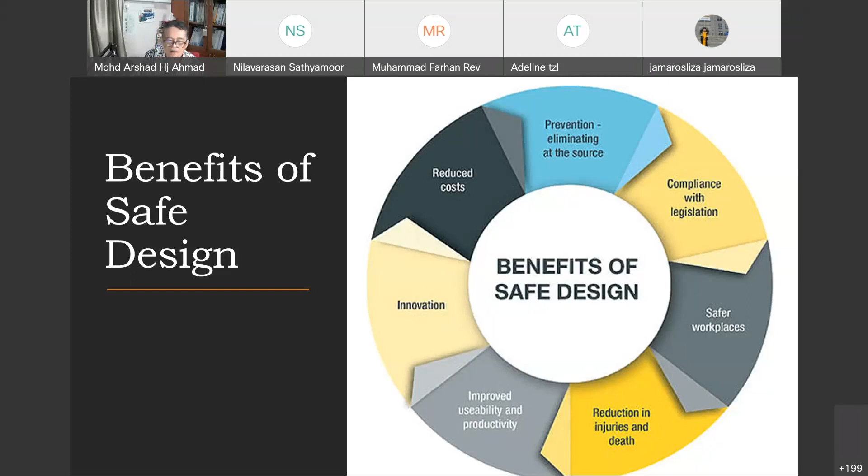So what is meant by preventing, eliminating at the source? Which means that we don't have any gas leak, we prevent that gas leak. We prevent fire. We prevent all these things. And with that, I believe that's the end of my presentation.